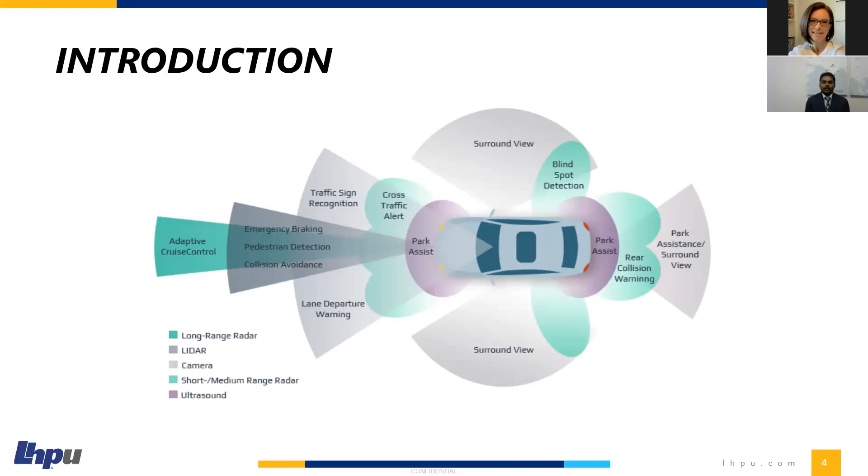During this course, we first got an introduction to CAN SAE J1939, which covers communication between vehicle parts, and we also got an overview of ISO 26262, which is the functional safety standard.

For this, I considered 3 ultrasonic sensors, and I placed them at the front of the vehicle in such a way that there is a 10 degree difference between each of the 3 sensors. As you can see in the middle picture, it was arranged so that it can be used for forward collision warning, and we can do the same for the rear.

As we know, the ultrasonic sensor works by transmitting sound waves first, and when it detects an object, the receiver receives the sound waves back. From this sensor we get the time, and knowing the speed of sound as 343 meters per second, using the formula speed equals distance by time, we get the distance.

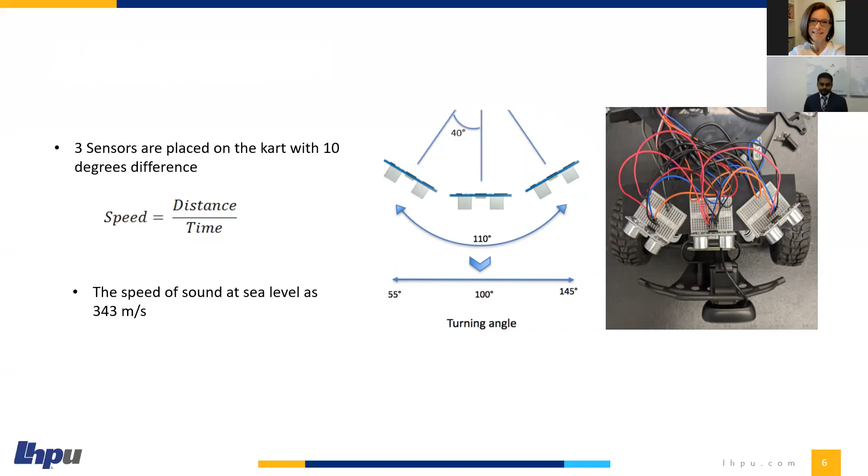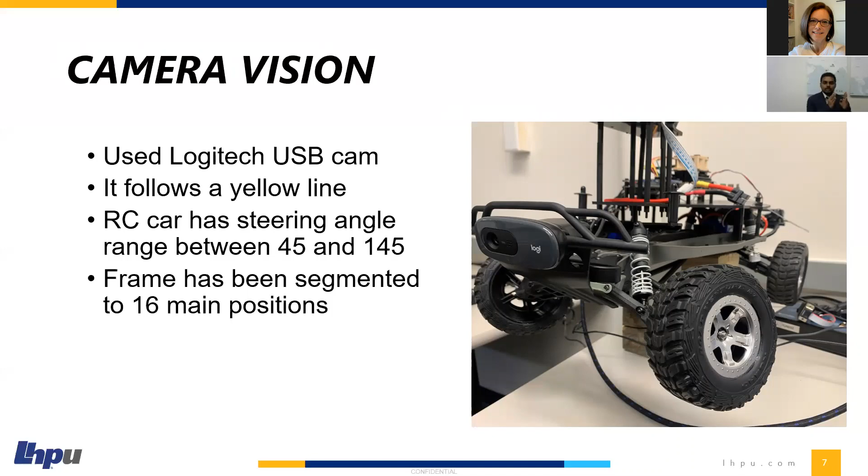Next, camera vision. For camera vision, we use the Logitech USB cam. The main purpose of the camera vision is following the yellow line. RC car has a steering angle ranging from 45 to 145 degrees, and I divided the whole frame into 16 parts, giving each part a certain angle from 45 to 145.

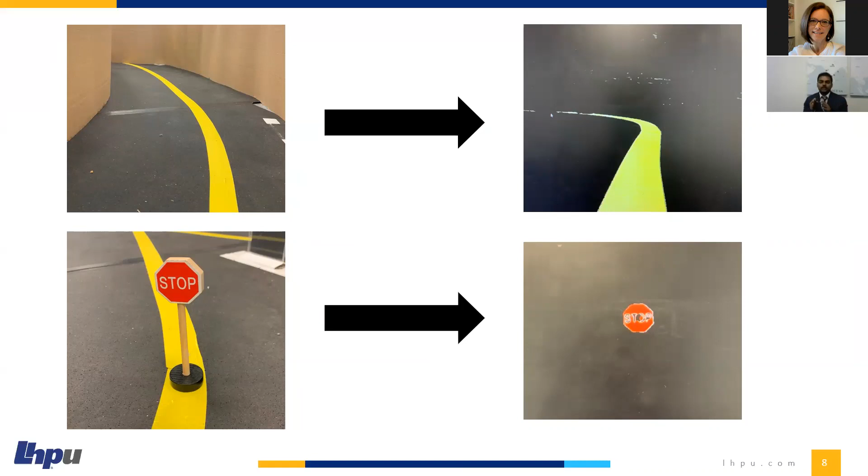As you can see on the left side is the raw image captured by the camera on the car, and we programmed it so that it can only see the yellow color and yellow line, so it will follow the yellow line. Similarly, we did the same with the red stop sign - whenever it sees the red stop sign, it detects it and will stop.

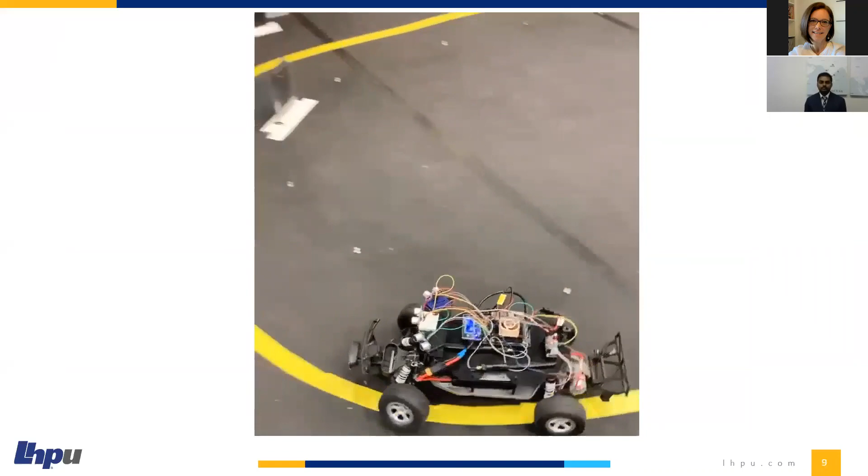Here is a video of the camera vision following the yellow line. As you can see, it always tries to follow the yellow line and stay in the center.

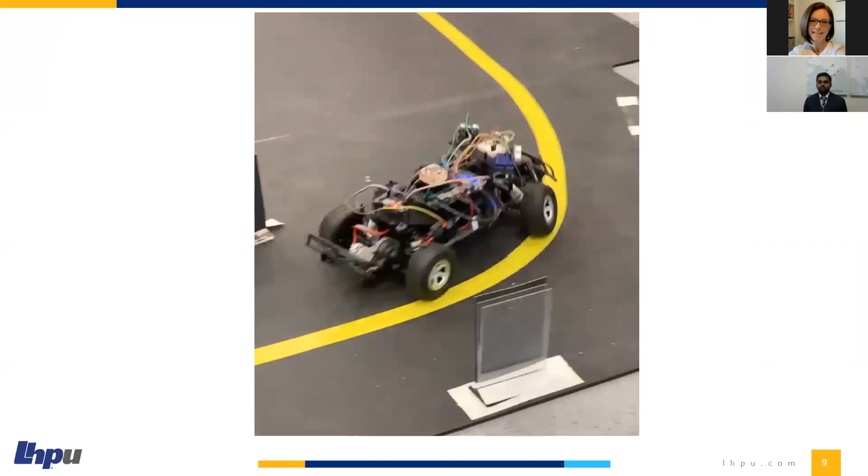Next, LiDAR, which stands for light detection and ranging. For this sensor, we use the 2D laser scanner RP LiDAR A1. The distance range of the LiDAR is 0.15 to 12 meters, the angular range covers 360 degrees, and the sample duration is about 0.5 milliseconds.

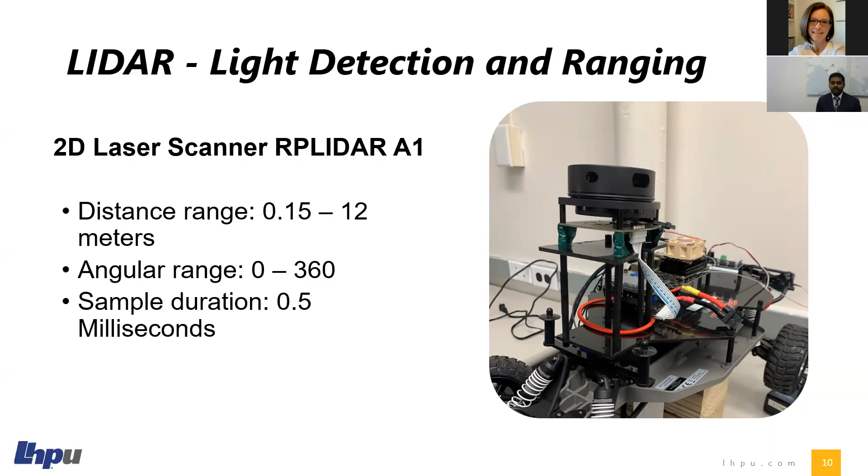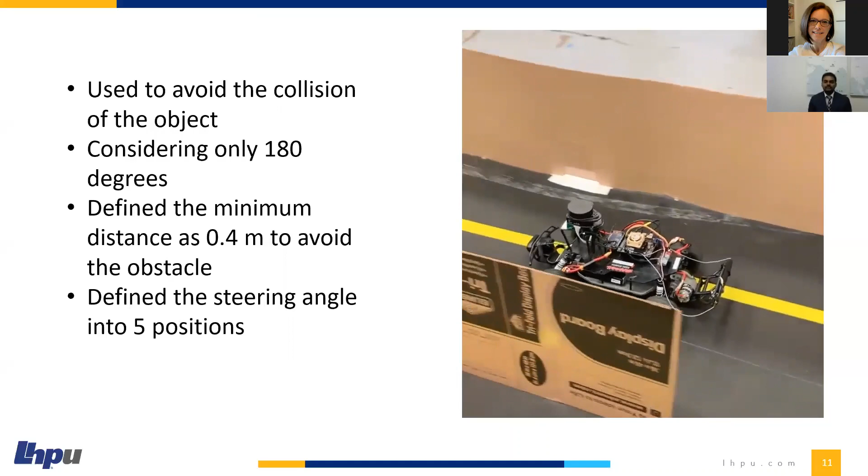Here's the video of LiDAR. As you can see, it will always try to stay in the center of those two cardboards. Whenever it detects something less than 0.4 meters, it will try to go to the other side.

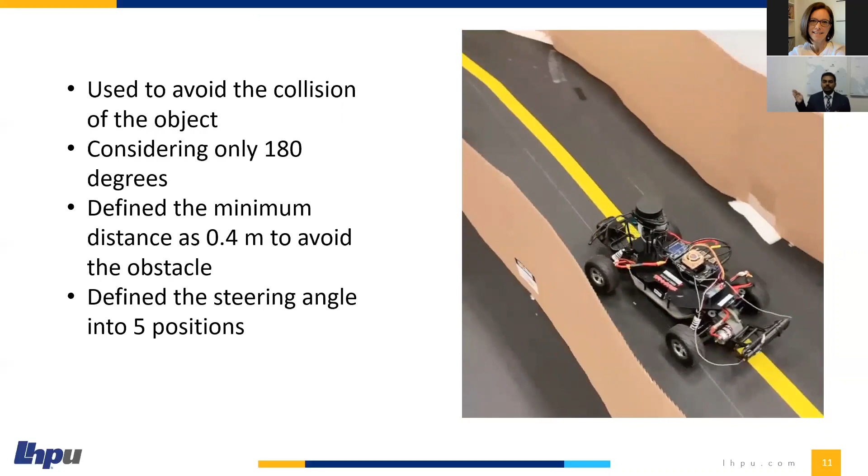Next, fusion. Why fusion? As I said earlier, the camera is used only for following the yellow line, so whenever there is an object on the yellow line, it will either stop or hit it. For LiDAR, it will detect the object, but it can't follow the yellow line.

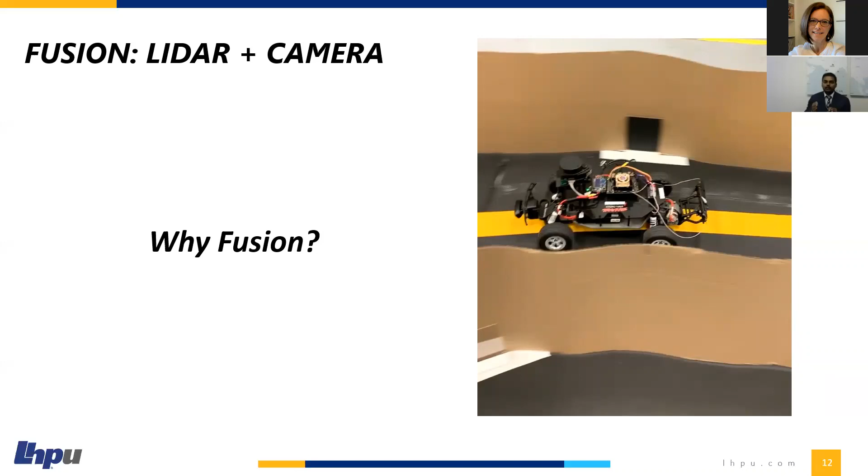So in the fusion, we combine the LiDAR and the camera such that it follows the yellow line, and at the same time, whenever there is an object in front of it, it tries to avoid it. Here's the video: as it follows the yellow line, whenever an object is placed, it tries to avoid it.

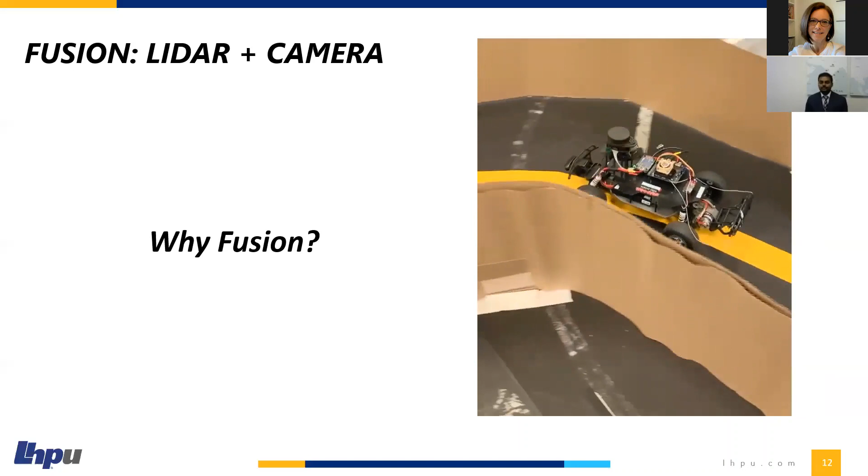So, in conclusion, I really got hands-on experience with various sensors in this training. I chose LHP because I found similar online courses regarding sensors, but those all used predefined data that we just worked on. In LHP, we work with the actual sensors, interpreting and implementing the data ourselves, so it's mainly hands-on experience. We got to know the errors and everything.

Also during this course, communication between my fellow trainees, the TA, and other interns really helped me get through this training. Whenever I had a question or any problem regarding the code, they were really helpful.

I faced some problems in this training, such as while working with the sonar sensor, the servo motor used for acceleration — I was not able to operate it. When I checked the manual, I got to know about that motor and tried to fix it.

Whenever I had a problem with any particular thing, I would just Google it and try to solve the problem. That really helped me in this course, as well as time management.

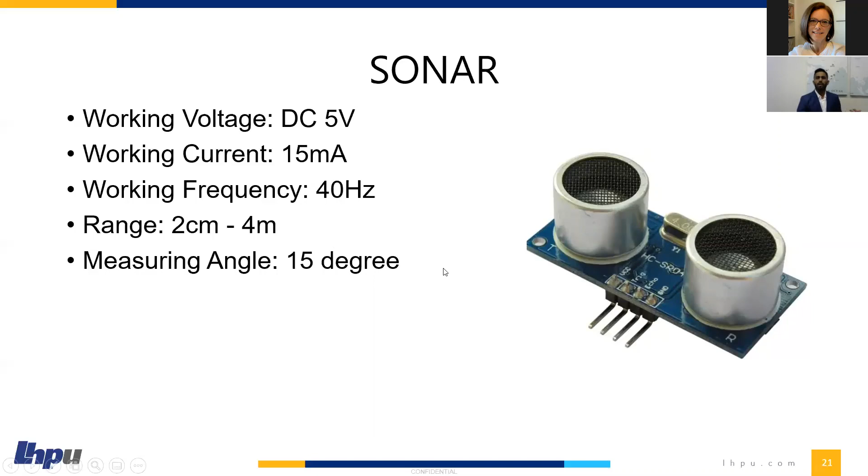The first sensor we used was Sonar. The main important part here is checking the range, which is 2 centimeters up to 4 meters. This is not a very accurate sensor; it gives good values only in this range, and above 4 meters it doesn't work. So the applications I developed using the Sonar were park assist, collision prevention, and blind spot detection.

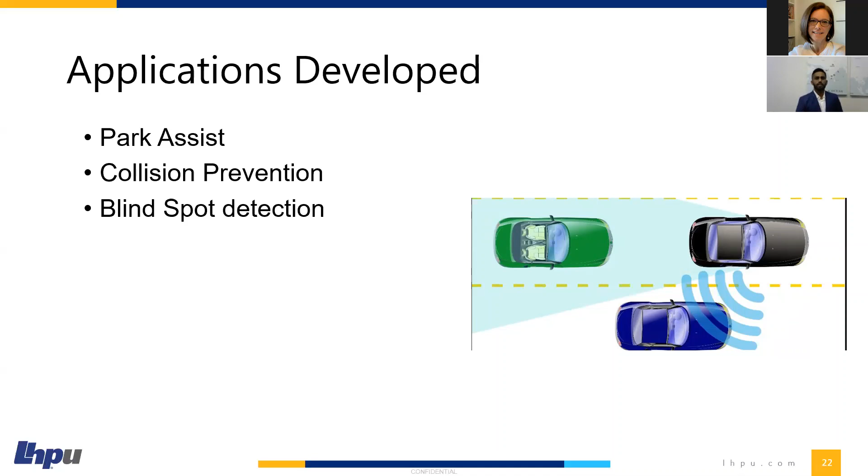Here's an example of how blind spot detection works. The sensor is faced at the side view mirror, facing the other lanes, the lanes which are not in the view of the rear view mirror. If an object is detected, if a car is detected, it blinks the light or rings an alarm, whatever we want it to do.

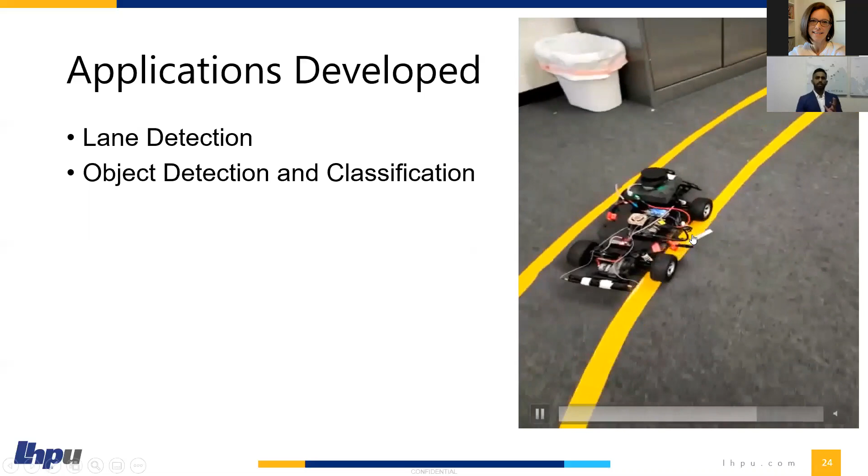Next, we used a camera. The field of view for the camera is 60 degrees. The applications developed using the camera are lane detection, object detection, and classification. Here's an example of how lane detection and lane following works, and it also gives us a lane departure warning.

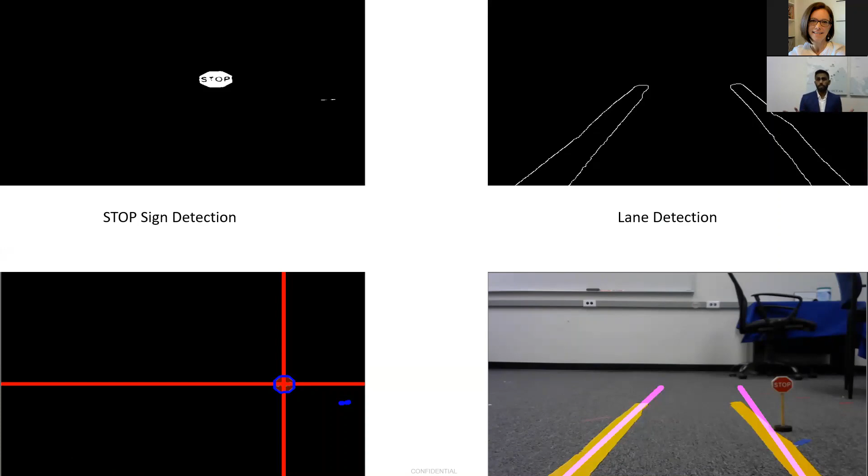Next we use the LiDAR, whose range is from 0.15 centimeters up to 12 meters with a precision of less than 0.5 millimeters. This is a very accurate sensor. The only drawback is that it's a 2D LiDAR, so any object not in its line of sight won't be detected.

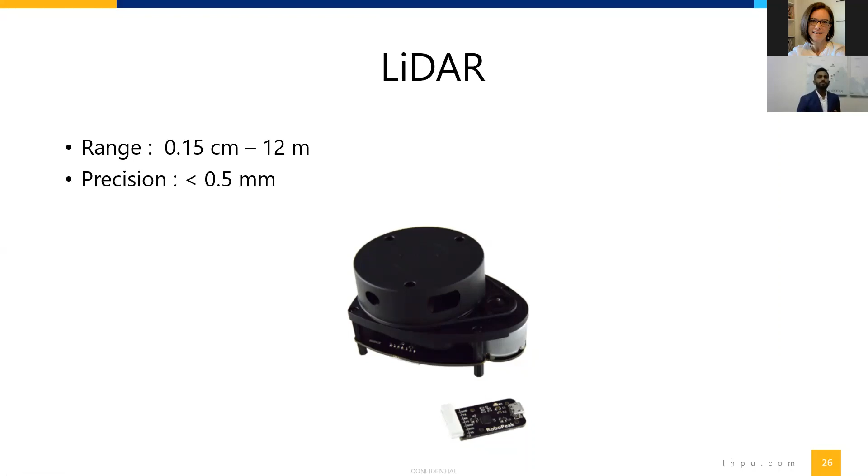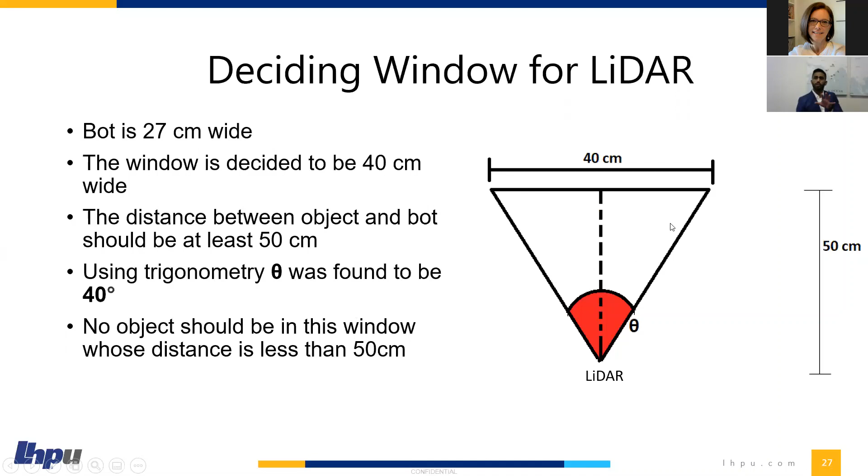I'm really proud of my algorithm for LiDAR; it's a good achievement that I did at LHP. Here's how it works: our bot is 27 centimeters wide, and if there's a window of 40 centimeters, the bot can go through it. So I decided the window should be 40 centimeters and at least 50 centimeters away, that is the height of the triangle. So at least 50 centimeters away, it should decide whether it can go through or not. Using simple trigonometry, I decided the angle, which was 40 degrees. As long as there are no objects in this triangle, this window will exist and the bot can go through.

Here's a good example. All these objects are actually out of this 50 centimeter range. The LiDAR could have chosen this part, this, or this one, but it chose this part because it sees up to 12 meters. So the algorithm is actually calculating the best path, not just at that moment, but based on what it can see up to 12 meters away, as I said.

So in the long duration, what would be the best route for it? After this angle is calculated, it is sent directly to the wheels. That was one of the challenges, getting the correct turning angles. Okay, fine, I've got the angle from LiDAR. How do I pass it to the wheels?

So for this, I implemented a PI controller where these angles from LiDAR are ratioed and changed according to the turning angles of the wheel. Also, getting the correct window size was really important, whether it should be 40 centimeters or 30 or 50 - we didn't know.

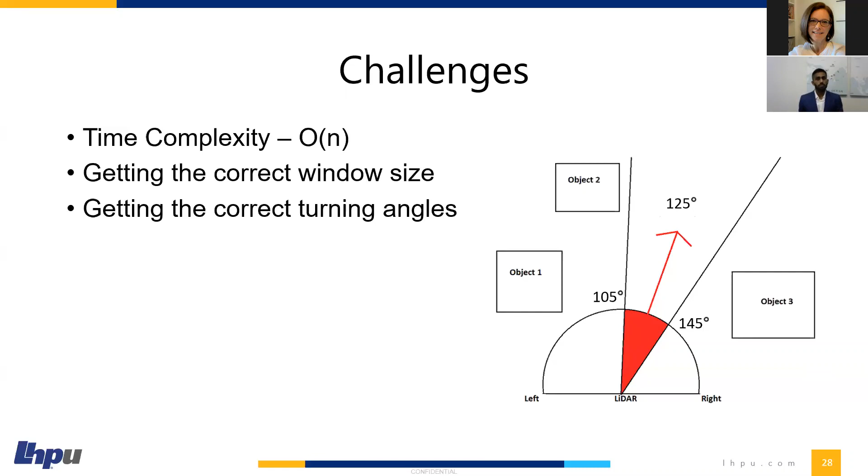Also, the time complexity here is really important. Time complexity basically is how well the algorithm works, how fast the algorithm is. So the current time complexity of the algorithm is O of n, which is fast, I would say. When we use a 3D LiDAR, the data points will increase from 360 to around 12,000. So if the time complexity is bad, the algorithm will be slow and we won't be able to use that data properly.

Here's the video of LiDAR, how it is working. It finds the best path automatically and just follows it.

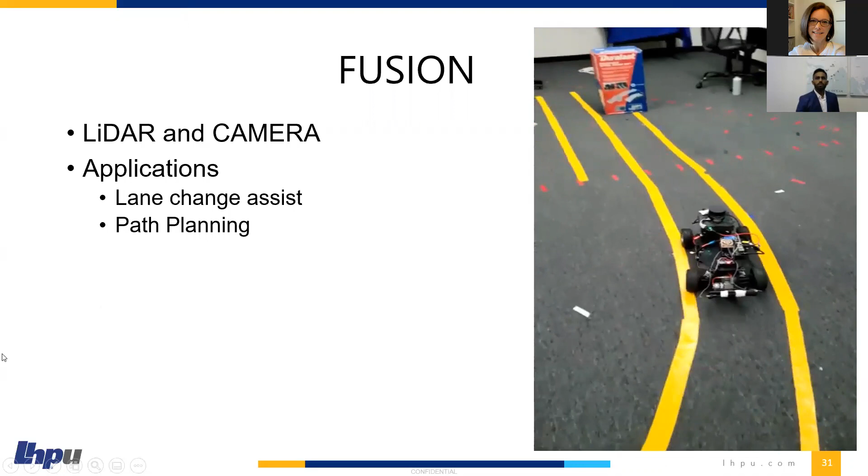So fusion, as Sai indicated - why fusion is required - because measuring distance from the camera is not an easy job and it's not accurate. So now we have a LiDAR. LiDAR can measure the distances. So we use the LiDAR and camera to detect the object using the camera, following the lanes using the camera, and the LiDAR measures the distance of the object.

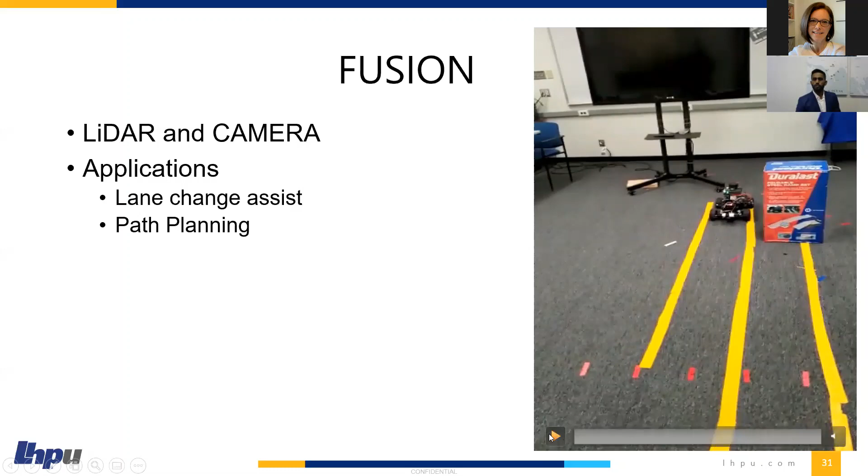So the application is developed for lane change assist and path planning. Here's how it works. So the car was following this lane. As soon as it detects another object, it switches lane and starts following the other lane. If there were no lanes on the left side, the car would have just stopped.

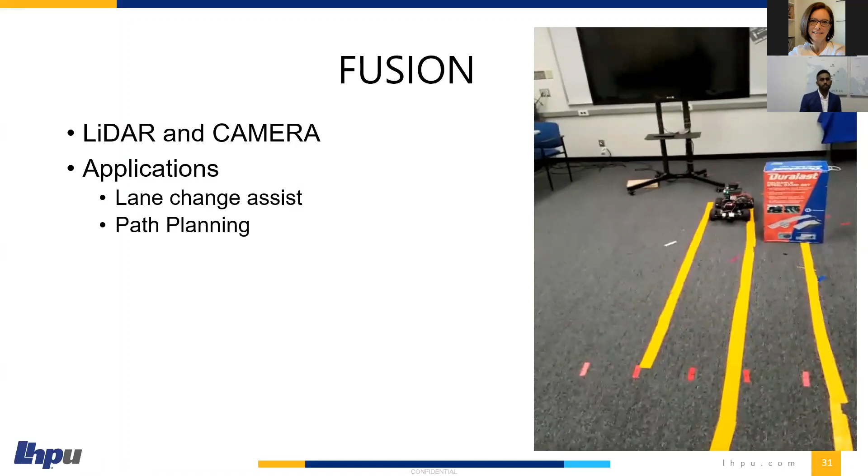So the challenges faced during the fusion were that the field of view of the camera and LiDAR did not match up. Also, we are using a 2D LiDAR, so the camera height and the LiDAR should have matched perfectly. Otherwise, object detection would have been a little more difficult.

So when I place the camera parallel to the floor, it has a dead zone of 60 centimeters. With respect to the car, that's a lot. But in a real world scenario, 60 centimeters is nothing, because the hood of the car will cover up that space. So for this, we tilted the angles and prevented the car from turning earlier than needed.

As future work, I would like to work more on radar and GPS. I have a couple of algorithms in mind, such as adaptive cruise control, which would work as radar can see much further than anything and can measure the speed of other objects. We can develop an algorithm which would judge the speed of other objects and change our car's speed. Also, using GPS, localization can be done really well, which will help in our fusion case as lane change assist and other things will work even better.

So concluding, we have developed these ADAS features such as lane detection, blind spot detection, prevention, path planning, lane change assist, and park assist throughout the course.